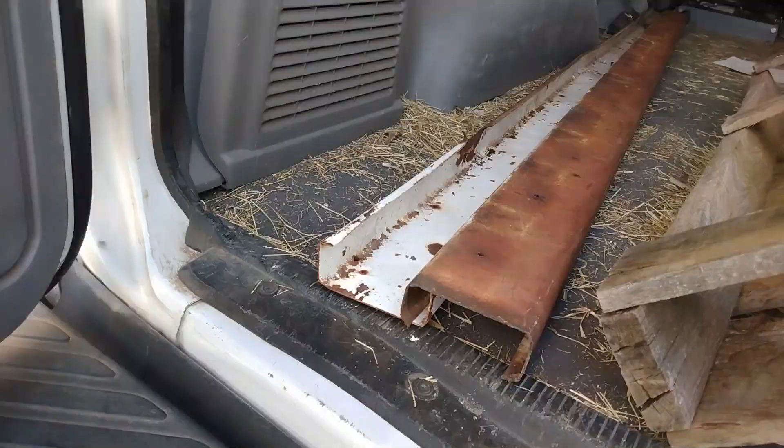I also found these 2 C-channels. They are a good size lengthwise to do the roof support for the greenhouse. I got these pallets for free, so they're gonna be probably used for shelving in the greenhouse. So that's so far what I got for it, other than the windows.

I'm also spending some time designing the greenhouse, putting measurements together for how the windows will fit together, the short side, the long side, the doors, the height, and all that. So I'm gonna show you some drawings and what I'm coming up with right now.

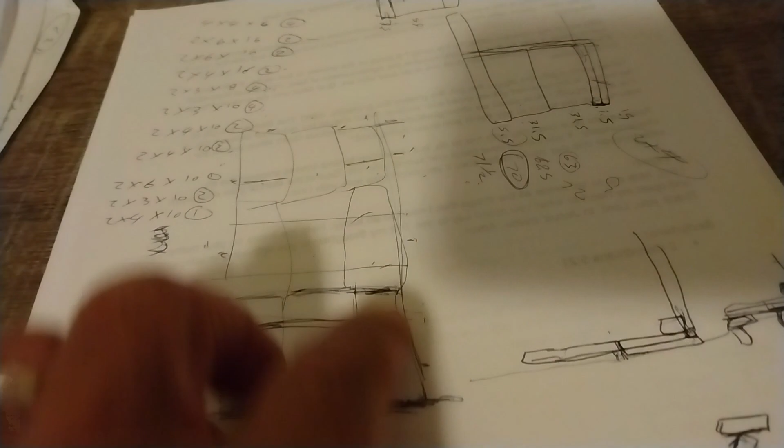So I'm spending time making drawings and different options for how the layout and construction will work, and my final choice is coming to have an 8 feet wide, 15 feet long approximate, with 2 beds on the sides, one door on one end and another door on the other end, and the roof will be the same windows laying flat and supported by beams.

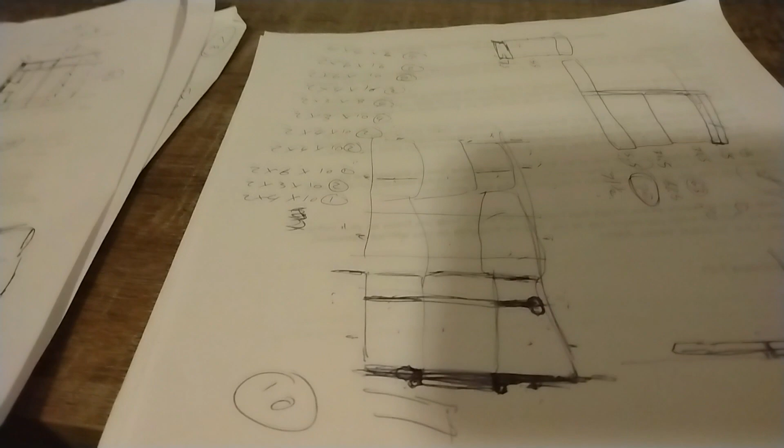Sideways, and there will be window screens on the top to protect the glass from hail, and also that will be a flat roof. It's going to be 6 feet tall, the building, so my wife can walk into it, and if she needs to do something there, she can.

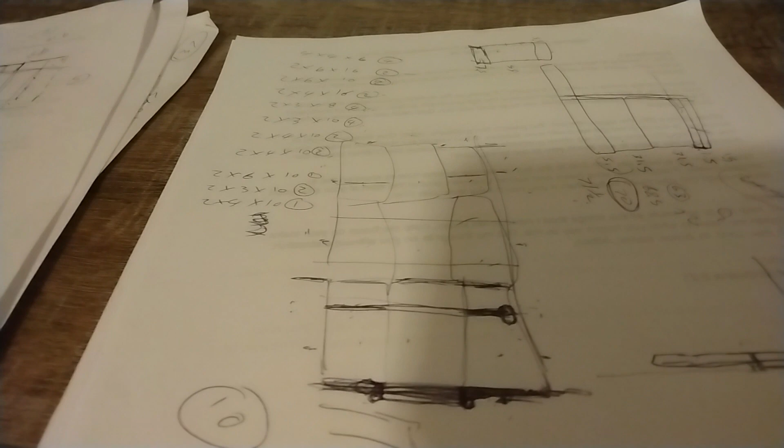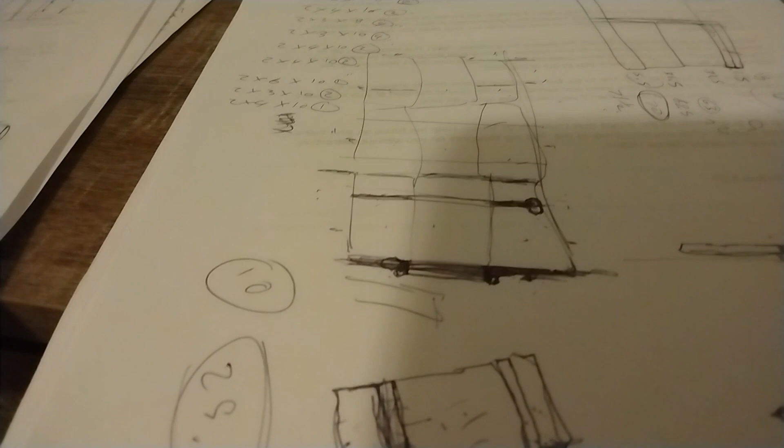But that will be only 6 feet tall, because when I use my lift to reach the top to work on this roof, I don't want to not be reaching any point. I want to be able to, when I come from the sides, reach here, or when I come from this side, reach here on the top. When I come from this side, I can reach here on the left.